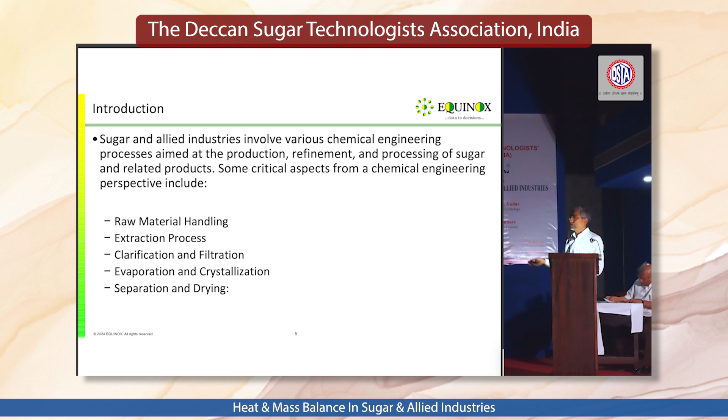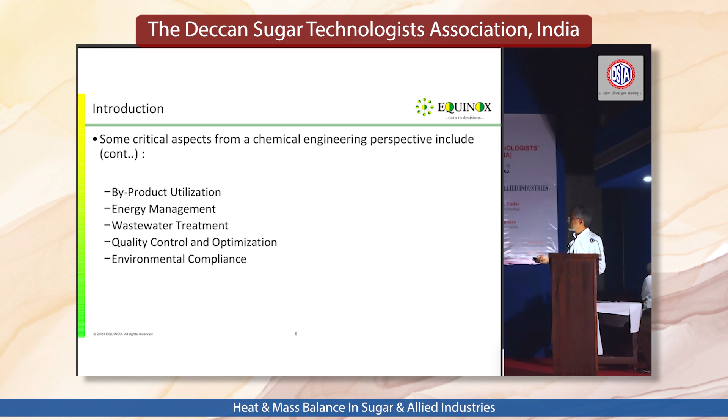All these are processes where we can apply the off-the-shelf simulation technology. I have focused more on, for example, the ethanol process, which I'll be talking about more, as a utilization of the by-product, and how we have used it. But then again, energy management, wastewater treatment, quality control, and so forth. For example, nowadays simulators directly give out information about your CO2 footprint. You build your process model on a simulator, and it gives you not only the heat and mass balance but also the CO2 footprint of the complete process. So these are some of the aspects related to the sugar industry.

Now, right now what we are talking about is more of the simulators which are available in the market, and what we can do with them. For example, heat and mass balance, the focus topic of this seminar, is the primary goal of the simulators. But not only that; you are able to extend your heat and mass balances into more detailed engineering of the process.

For example, you can develop your heat and mass balance model and then focus on the heat exchangers. So do a simple heat exchanger design versus a rigorous one, wherein you can generate data sheets which can be directly given to the detail engineer or the heat exchanger vendor itself.

That kind of processor are there. That too through one gateway, one simulator, wherein you do the main heat and mass balance and you do the subsequent activity. Distillation is another thing which is very much there.

Rightly said, it's not directly related to sugar. Fortunately, sugar industry doesn't have any mass transfer as such, except for the crystallizer. But the allied industry, like ethanol process, downstream process, you have a lot of mass transfer equipments which are there. The distillation which is there.

Now, simulators are very powerful tools which can handle it very well. Not only modeling or designing the columns, but then getting some detailed analysis of it, the flooding part of it, the traffic part of it, and so forth.

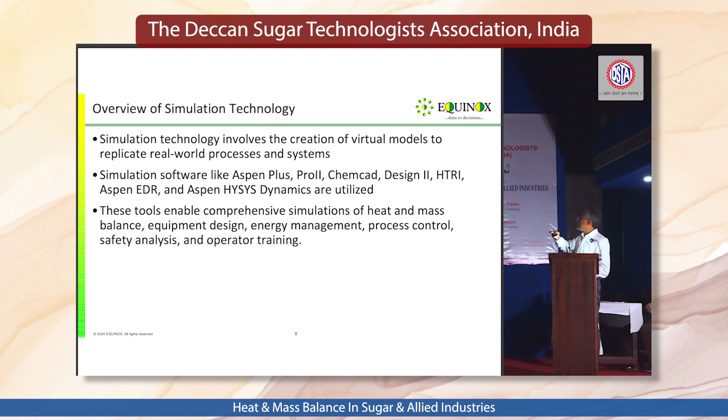Like I said, our exercise was more on the ethanol process side. So I'll be quickly talking about what exactly was done in this particular process. The simulators we used, the kind of activity which we have done, where the customer could get value out of it, and the simulation work which we have done for the particular process. So we are focusing on the ethanol, wherein we have used a number of packages.

For example, when we are starting a design, we can also do some kind of capital cost estimation right at the HMB level. So when you do a rigorous heat and mass balance with the simulators, you have technologies with which you get preliminary cost estimates for your plant, a very good estimate, capital as well as operating cost.

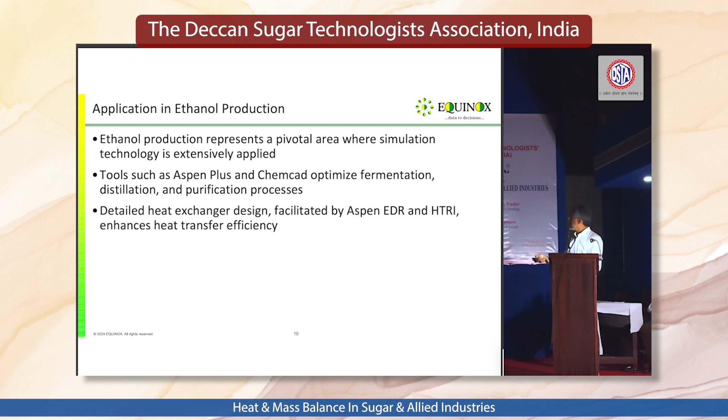Like I said, the dynamic model for it, and then benefits, some of the things I'll just skip and move on to the actual case which we have handled. So maybe a little bit here. These are some of the benefits we are talking about. The rigorous heat and mass balance, which we call the steady state model, can be used as a real-time optimizer. There are applications like the digital twin.

As we keep on telling time and again, the moment you develop a certain model, it becomes an asset for that organization. Now this asset is utilized at different points of time. For example, at the design stage itself, something is developed, and after design, when the plant is really set up, the same model can be utilized in a number of ways.

One thing is assessing the performance in future, like what Alok shared earlier: when the information is coming from the plant on a real-time basis, you use the same model, modify it a little bit, and then keep cross checking with the design. The design part is already there as a digital twin, or digital virtual plant as we used to call it earlier.

So that virtual plant is already there, and you can keep comparing your present operation, get information, try to find out where things are going wrong or where the bottleneck is, and then de-bottleneck accordingly. So it becomes an asset for the organization. That's why, in this case, the thought was to start the design with a simulation model itself. So that is what has been done here.

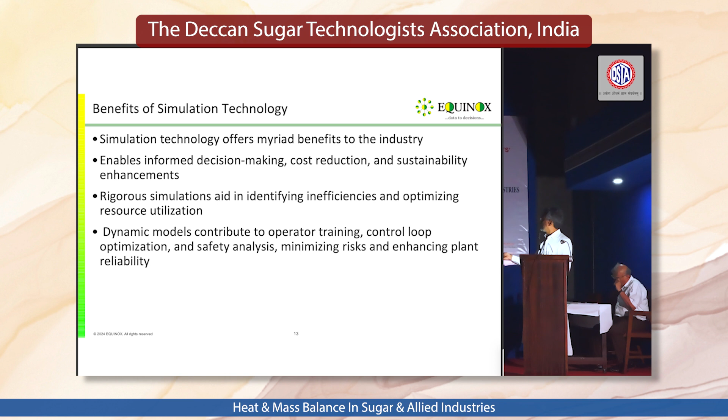So this was a plant with a capacity of 120 kiloliters per day, coming up in central India. It was, as I said, executed in 2 phases. In the first phase there was information coming from the existing plant. There was a plant already there, and this is supposed to be a scale-up, using that data to build a new model. So one thing was building the model, and then in the initial phase validating it with the data which came from the operation of the earlier plant.

So the design activity was first validating, so that the issue related to the accuracy of your model is addressed. Once your validated model is there, then you do a scale-up on that. One of the points raised was how to ensure that the simulation is really replicating your plant, that it's a real digital twin or virtual plant of your system. You get real data from the plant, and there are ways and means of doing it. Simulators now have very advanced techniques and built-in functionalities, wherein you can change the interaction properties of different components and keep improving the accuracy of the model.

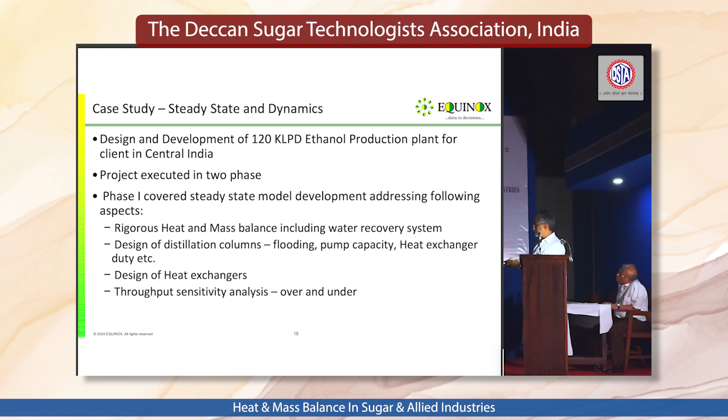So here the idea was that the data was there from a smaller plant. You build the plant, you validate your properties, and then you get to the next stage of scaling up. Not just scaling up, but also turn down and turn up for the 120 plus or minus capacity, and it has to be validated whether the columns are going to perform or not, or what kind of margins are to be kept. So that kind of thing was taken care of. That was the first stage, the model part, the rigorous heat and mass balance. Then you move on to detailed design of heat exchangers, because it doesn't stop there. Each and every exchanger of the system was modeled in detail, and data sheets were generated out of it. And then the sensitivity analysis for over and under.

The second phase was more the development of the dynamic model. The actual dynamic model was created from the steady state model. I'll show some screenshots. Unfortunately, we had the idea of showing you certain things, but there is an issue with the licenses, so I'll just show the screenshots. The idea was, as I said, the training of the likely staff who are going to operate the plant, plus development of the control strategy.

Many times there are previous experiences, but the question is whether they can be improved or some changes can be done so that the plant can be brought to steady state in a faster way. So that kind of thing was also tried out. Different strategies were tried out. Also whether the control strategy was okay or not was tested using the dynamic model. So certain things were done prior to going in for fabrication itself. The final designs are ready, the virtual model of the plant is already in place, and it is getting tested for its performance, and also training.

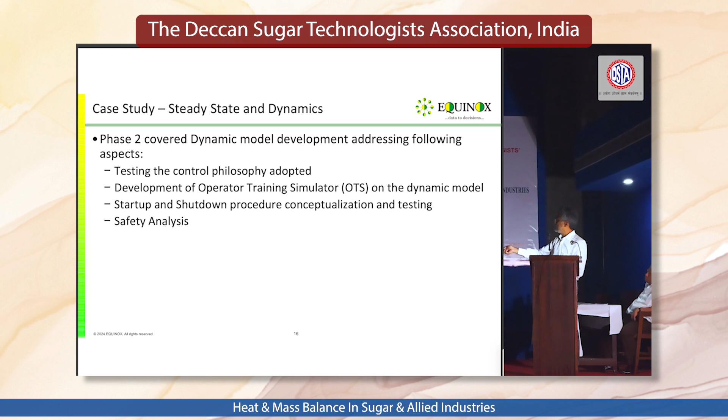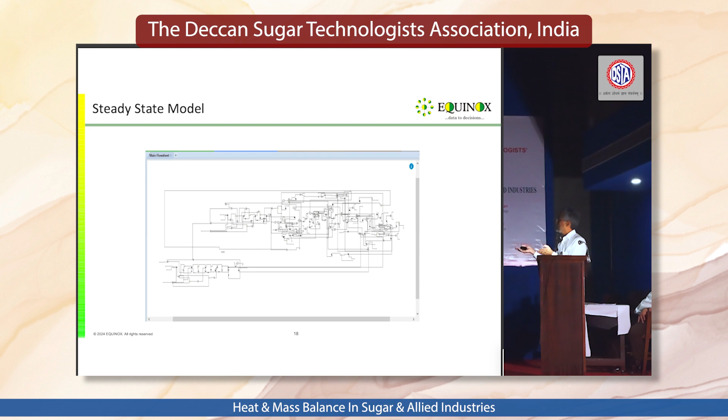And the good part is we could do calculation automation. For example, I can just change the number at one place, the input number, the throughput, and my system gets calculated automatically. Everything is taken care of. The distillation system, the purity part, I put a kind of calculator for it to do it automatically. So that kind of ease of analyzing the system, doing a sensitivity analysis, is possible with the so-called simulators here.

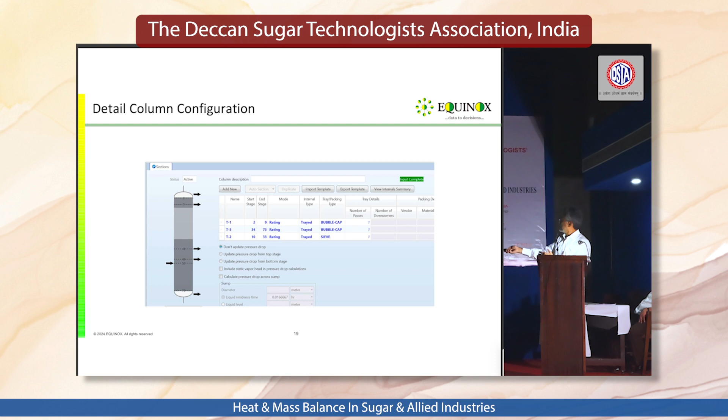This is something I like: as I said, not only the so-called theoretical stages calculation, but we can also go into the detailed analysis. But again, we call this a pre-FEED kind of activity. This goes finally to the actual vendor who will revalidate it. But you can do a simple calculation, finding out what kind of flooding, so the hydraulic calculations can be done for the actual column performance. All this comes as a part of the development HMB. This is a heat and mass balance to start off with, and then you do all the focus part of it.

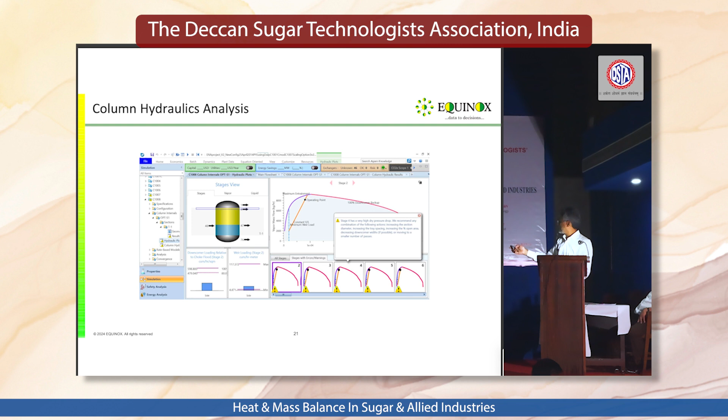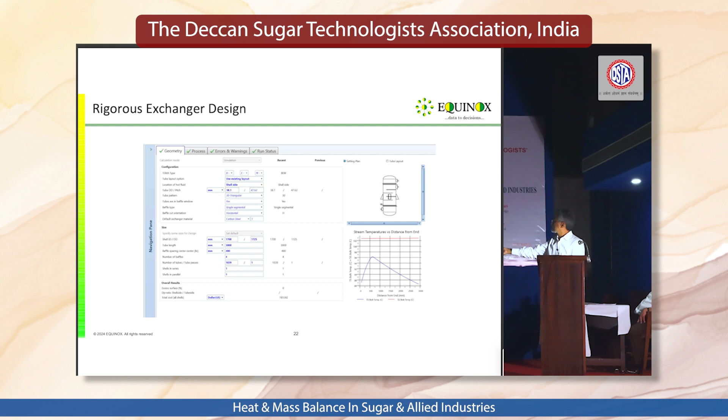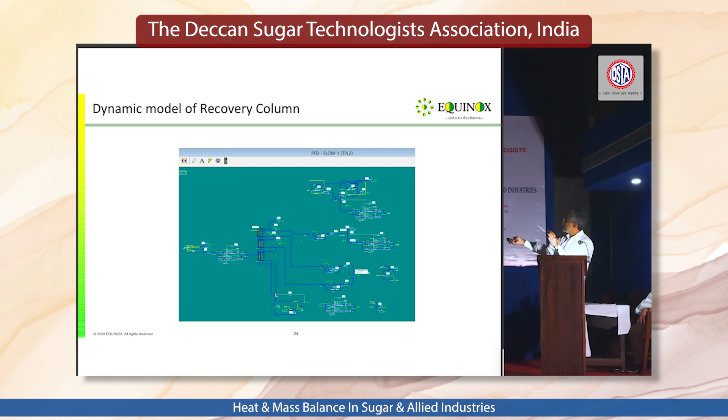This again, I was talking about the rigorous heat and energy balance, the rigorous exchanger design. So you get directly TEMA data sheets, which can go directly to the fabricator. This is the dynamic model I was talking about, the dynamic in the simulator environment. So imagine the plant is not in place, but we already have all the DCS screens, distributed control systems, ready, which the operating personnel are going to see when the actual DCS comes in the picture.

So this is created before the actual plant has come in, and it operates as the main plant is going to operate. All the control system, all the safety systems, all the interlocks which are going to be there in the final plant are built into this, and the user sees these kinds of interfaces. So if he's put in a room where the screens are there, it's almost like sitting in his control room.

Huh? Please conclude. Yeah.

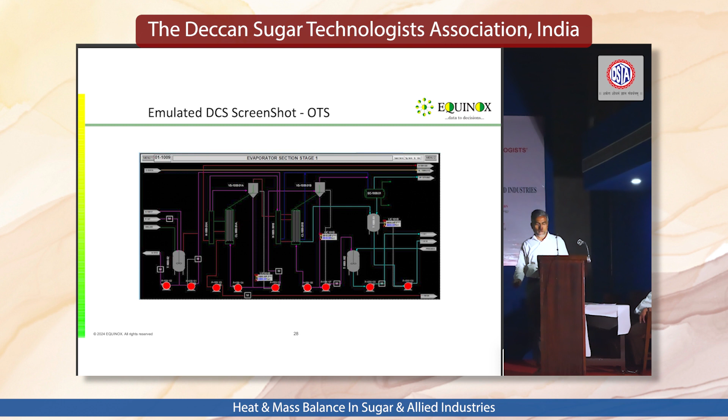So these are some screenshots of the actual simulators, the OTS we had created, the DCS screenshots. Okay. So in conclusion, with that I'll open the floor more for discussion, so that will be more productive. This is our first hand experience, and we are very confident about other industries. Obviously, for the sugar industry we are equally confident that it will be very important, and useful as far as the energy part is concerned.

I think one of the things is that the water pinch and the heat pinch are very important. I don't know whether some of the publications talk about these things, the heat integration, because essentially what I feel is sugar refining or sugar purification is nothing but a heat transfer process wherein you are taking out 89-90% of water. It's like an evaporation process. So from that perspective, it's only water separation. Even in ethanol, it's the same thing.

What ultimately we are doing is removing a huge amount of water, and water has a very high latent heat. And that heat, I was wondering, any of the sugar experts here, what is the typical specific heat requirement, the thermodynamic limit? When we use simulators, we always talk about what is the thermodynamic limit.

That is supposed to be the one which cannot be violated. So whatever people claim, it cannot go below that. So for a typical sugar industry, what is this thermodynamic standard which we should be targeting? And then when we say a sugar plant is operating at maybe 90% of my thermodynamic limit, that is the terminology which they use for refining.

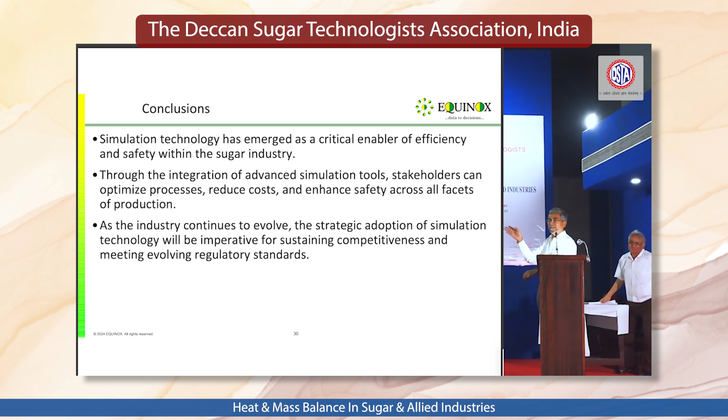Please conclude. Yeah, I think with that, if questions are there, I would be glad to address them. Now the paper is open for discussion. I think I've taken 20 minutes, I kept a watch. It is a topic of passion, so I can go on for quite some time. But discussion is more important; it should be thrown open. Time is short. Yeah, exactly. Details we can always discuss beyond this.

Since there is no question from the audience, it is understood that the audience has understood very nicely. Understood or not understood? Two probabilities will be there. Completely understood or not understood. Yeah, he wants to ask something. Just one question here.

Hello. Very interesting presentation. You said you did one case study in Central India of 120 KLPD. Yeah, this is the case study we are talking about. So how was your experience? They were operating the plant with certain capacity, certain inputs and outputs. Was the objective of your study to evaluate or to improve? No, the objective was that for the new plant, the complete design is to be done. This was a totally new plant? Yes, totally new plant. The data from the old, smaller plant was there to validate the model.

So my question is, if you normally operate a 120 KLPD plant, and then use your inputs and your software, do you see any improvement in the total performance, or how much is it? Unfortunately, that 120 KLPD heat and mass balance was not there. What do you mean, not there? The old plant was a smaller capacity, so obviously the mass balance was for a smaller capacity. If we prorate it for the higher capacity, that would have been a linear one. So I don't know whether that is a good number to be compared with.